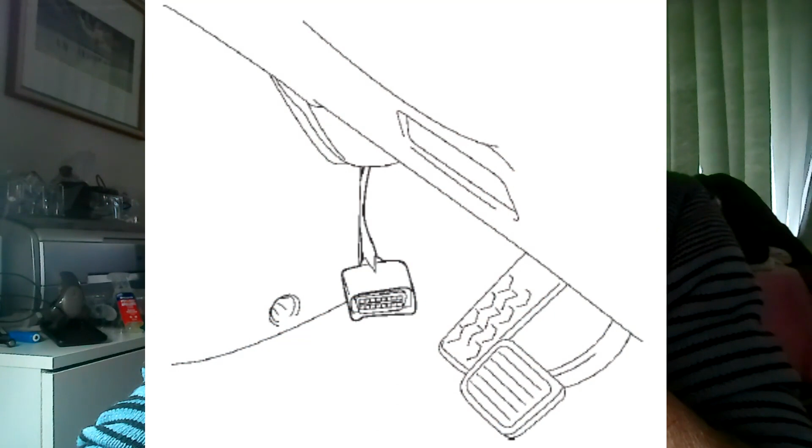Note, the RS232 loopback connector is only used for diagnosis of the Tech tool itself. Okay, so we don't have one. If you need one, you'd have to buy one. So the ALDL/DLC connector is located in the driver's footwell behind the plastic cover for the center console. You should be able to locate it by placing your fingers behind the plastic cover, pull out the plug and cable and allow the connection.

Note, in a left-hand drive vehicle, it's on the left-hand side footwell, not the right-hand side footwell. It's always in the driver's side well.

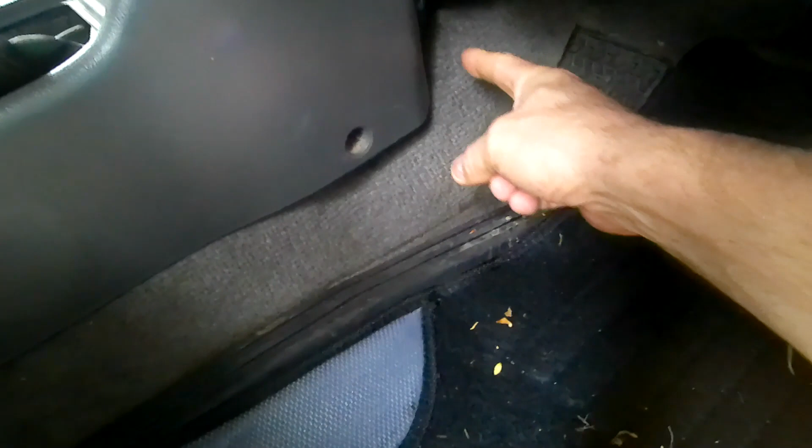Hi everybody, I just thought I'd show you some bits and pieces for the Tech 2. Okay, so the location of the cable that you need to connect your Tech 2 is going to be right behind this panel here. And there's the cable sticking out right there. That's what you're looking for. Now if you have a left-hand drive car, it'll be on the left-hand drive side. It's on the driver's side regardless of which car you have.

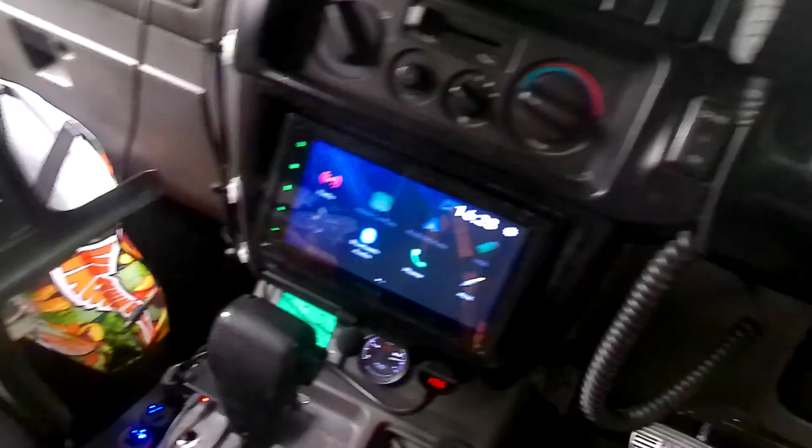Okay? This is a Tech 2. There you go. Tech 2, cable, and plug. See the plug with the adapter. That's the adapter to get it to interface with the car. That's where it fits on there.

Okay, so item number 1 is the PCMCIA card. Now I don't know if you can see, but in the slot at the top there is where you put the PCM card. In here we have an Isuzu PCM card, which is the one you need. The loopback connector, can't see one of those. So maybe it didn't come with a loopback connector. If it did, I don't know where it is.

We've got a bag full of adapters here, which we never use. We've got different interfaces and different vehicles, I suppose. And there's a box here with a power supply for mains and an American plug on it. There's also something here which I have no idea what it is. So I'll have a look and see if I can investigate.

Item number 2, the loopback connector, doesn't seem to be there. So, item number 3, the 1619 SAE adapter is this. That's the adapter, and it goes to the connector at the front there. You need to have that, otherwise you can't connect to the car. The DLC cable. This is the DLC cable. And the Tech 2 itself.

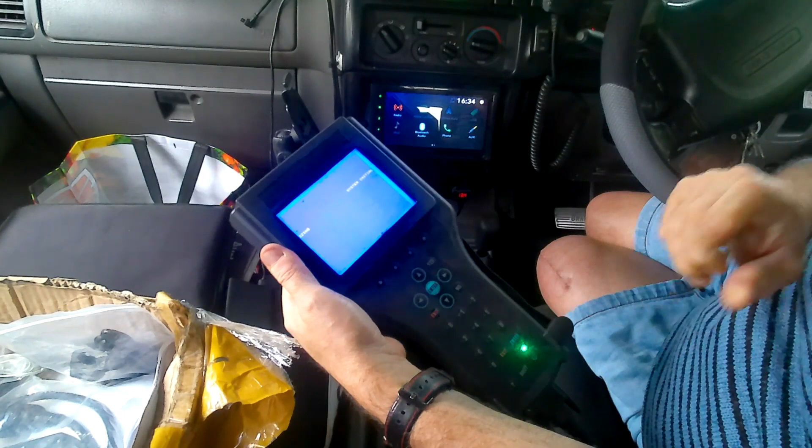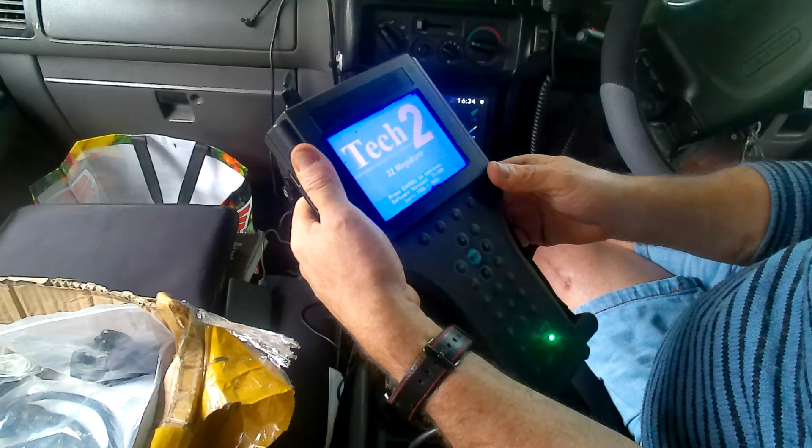Okay, so here we have the Tech 2, it's plugged in now, we've got the engine running. What we need to do now is switch it on. So we go with the power button, which is in the bottom right hand corner here. We press that and we get the initial screen set up. I presume you can see that from there. It goes through a number of self-tests and goes to this point here. It says press enter to continue. We press enter in the center there.

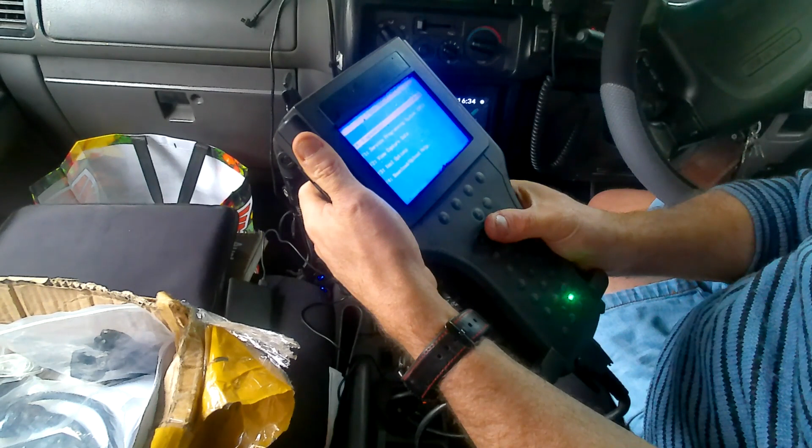Now it wants to know whether you want to go into the diagnostics, the service programming system, view capture data, tool options, the download, upload, help. So we'll go into diagnostics and we'll look at DTCs first. So we press enter again and it gives us a year. We have to pick the correct year for our vehicle. This one is 2000. It's a Trooper Bighorn Jackaroo. And the powertrain is a 4JX1. So we scroll down to L4 4JX1 and we click OK.

Now it says turn on ignition and we confirm for that. And there you go, it gives you the engine part number, the broadcast code and the identifier. We press enter again. And we can go into diagnostic trouble codes, DTC. And then we say read DTC info by priority. No diagnostic trouble code stored. That is a good thing. So we hit exit to come out of there. We could clear it if there was some, and there's nothing there anyway, so we'll exit again.

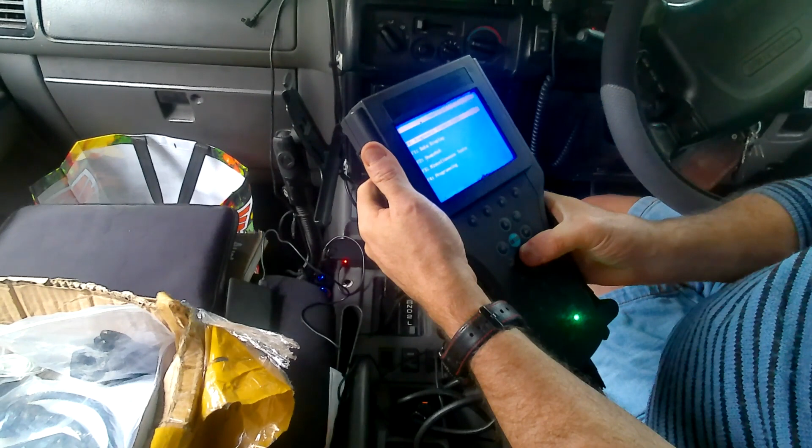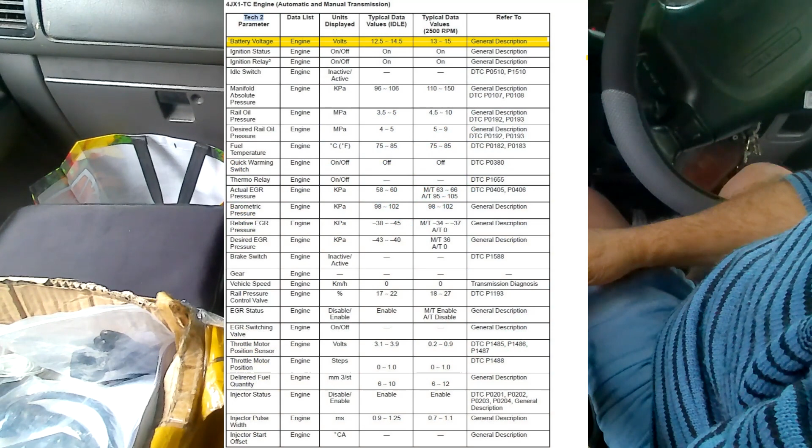Okay, so we're back to the powertrain. What do we want to do? We want to look at the data display. So we'll press data display and press enter, and it brings us up with the screen, which is the running parameters I showed you at the end of the video there. So you've got battery voltage 13.7 volts. We can rev that up a little bit, it'll increase. It's going up to 14.1. So that's good, it's the alternator output.

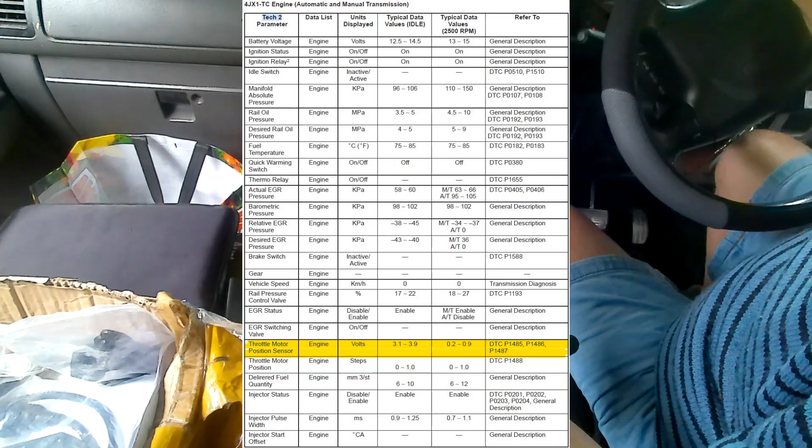Ignition status is on, 12 volts. Pedal position sensor is at 0, we're on idle. Now if I press that, you see it increases in percentage there. So we're always looking at the one with the white line on it. So the position sensor there is 0.33 volts, and as you see, as I increase, the voltage increases. The pedal position sensor status is closed. If I press it, it'll go to open. Idle switch is closed.

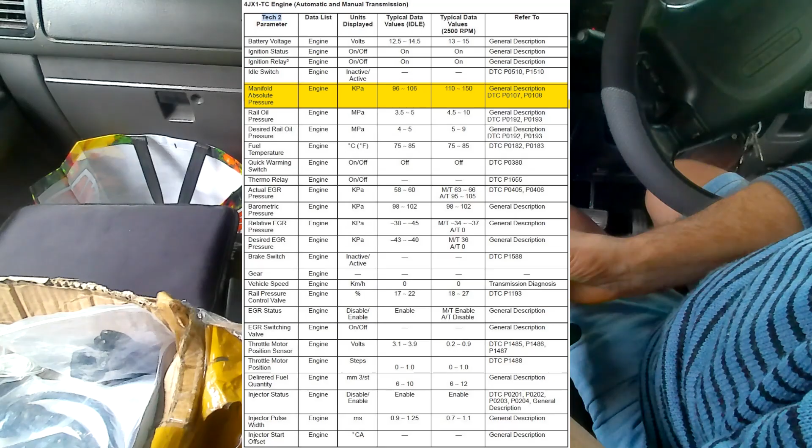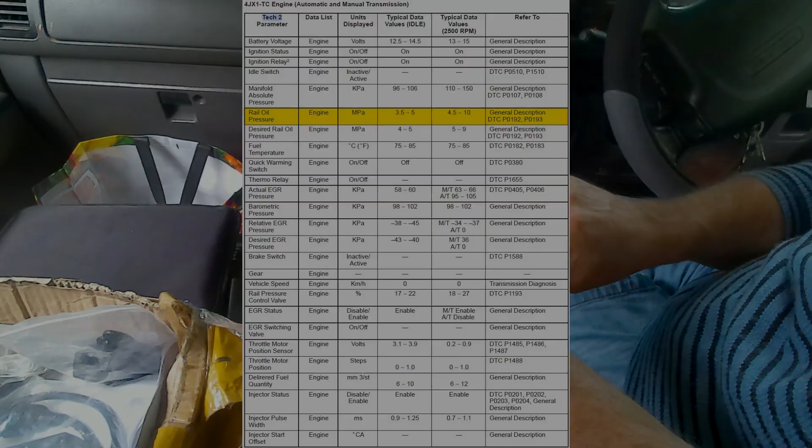Manifold absolute pressure 104 kPa. Barometric pressure 99 kPa. I think that's the outside pressure. Engine coolant temperature 54 degrees centigrade. And then the next number down is 9 of 40. So that's how many items we have on here, 40. Rail oil pressure 4.3. It's around about 4 MPa, the desired pressure. Desired rail oil pressure, which is about 4. So we're slightly above, but we're not doing too bad.

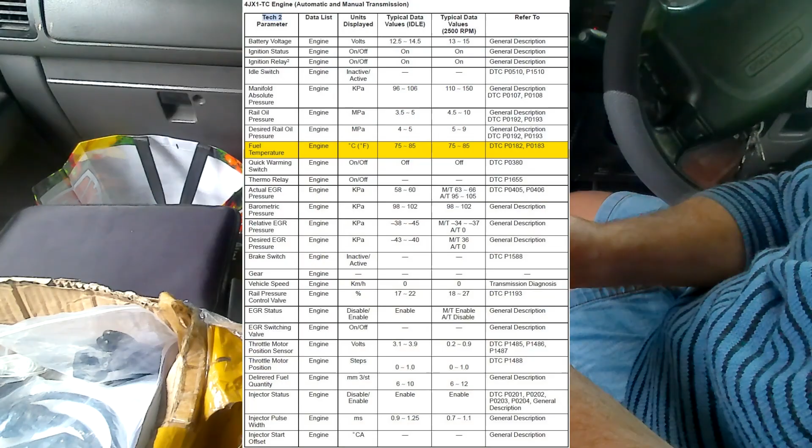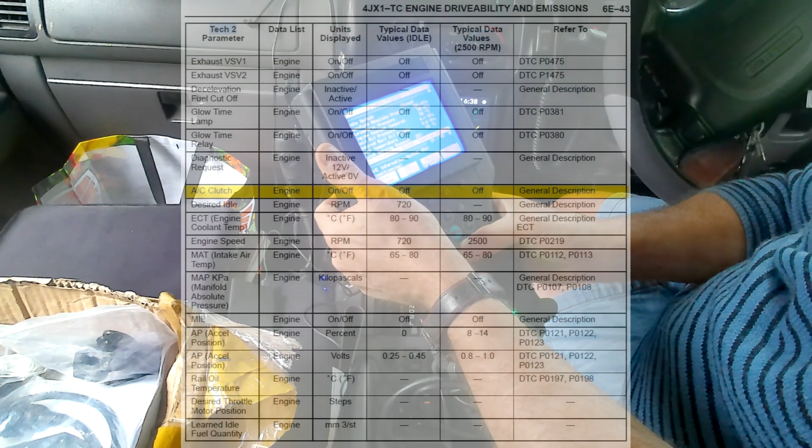Fuel temperature 44 degrees centigrade. Quick warming request is off because the engine's running. If we're on ignition on status, it might be on. AC information switch inactive. If I press the AC button, turn the fan on, you see we get 12 volts there. Turn the AC off, no volts. Okay, down one more. Actual EGR pressure 64.6 kPa. I don't know whether that's right or not.

Rail oil temperature, air intake temperature, desired idle speed, engine speed, brake switch open. If I press the brake switch it goes to closed.

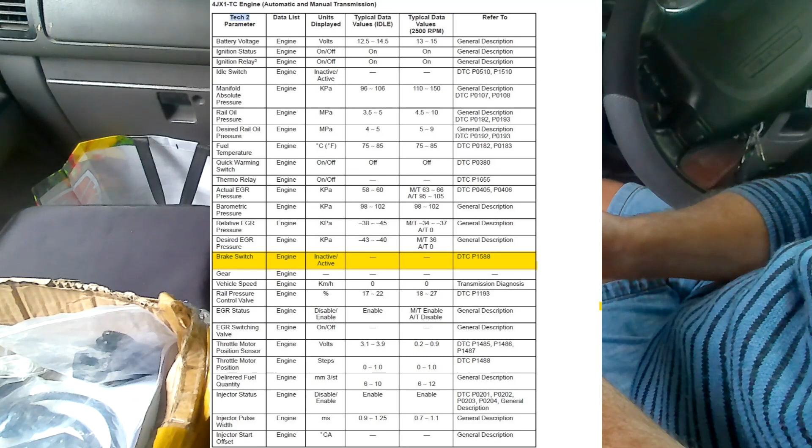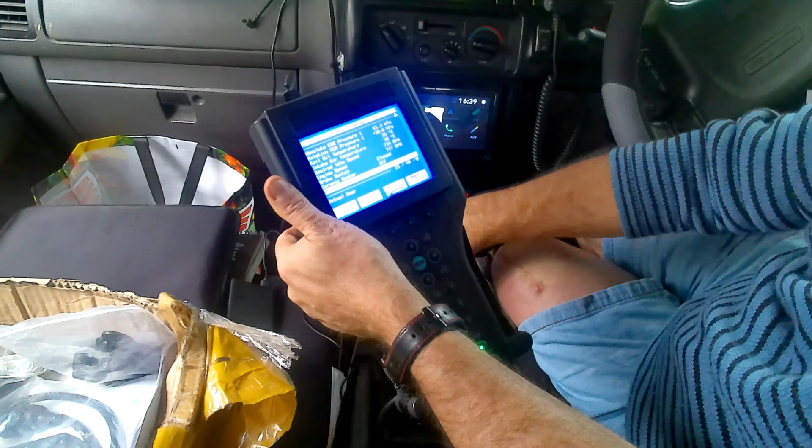Ceramic heaters are off. Actual gear, we're in park. If I put my foot on the brake and go into reverse or drive, you see it changes to actual gear is drive 3-2 low. It's in one of those. If I go to neutral, it goes to neutral. If I go to reverse, it goes to reverse. And if I go to park, it goes to P. So we're on 24. Vehicle speed, well, we're not moving, so it's 0.

Rail pressure control valve, 19%. Thermo relay on. EGR status. EGR switching valve. EGR regulating valve. Throttle position sensor voltage. Throttle position, 6 steps. Delivered fuel quantity, 5 cubic millimeters. STK, whatever STK means.

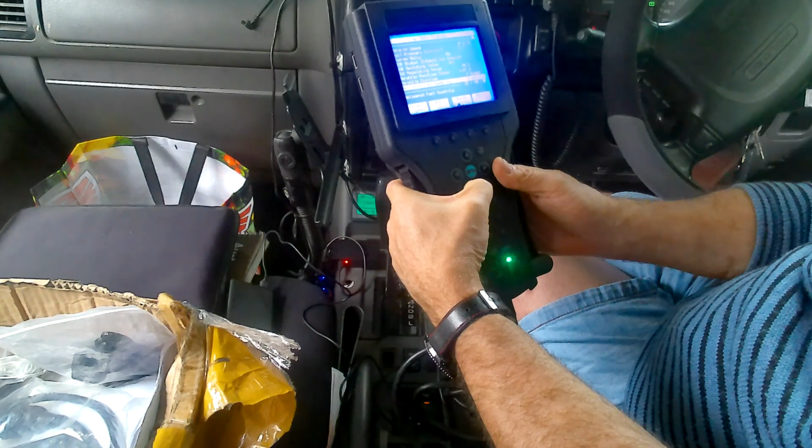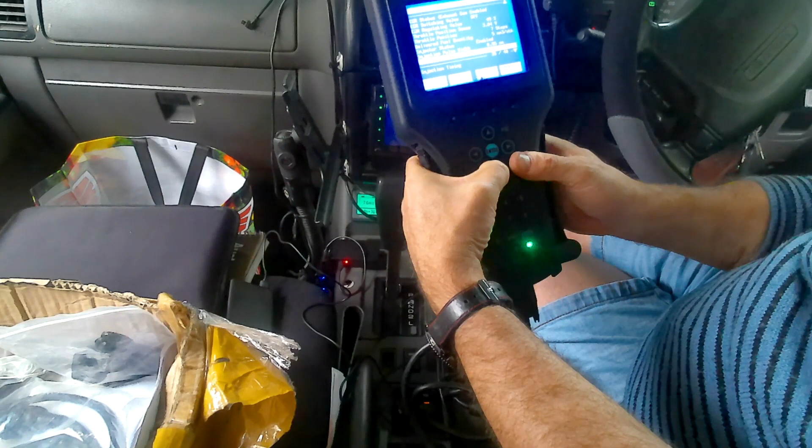Injector status is enabled. Injection pulse width, 97 milliseconds. Injection timing, minus 4.5 degrees CA, whatever CA means. Exhaust pressure, valve 2, off, off. Alright, so let's exit out of this.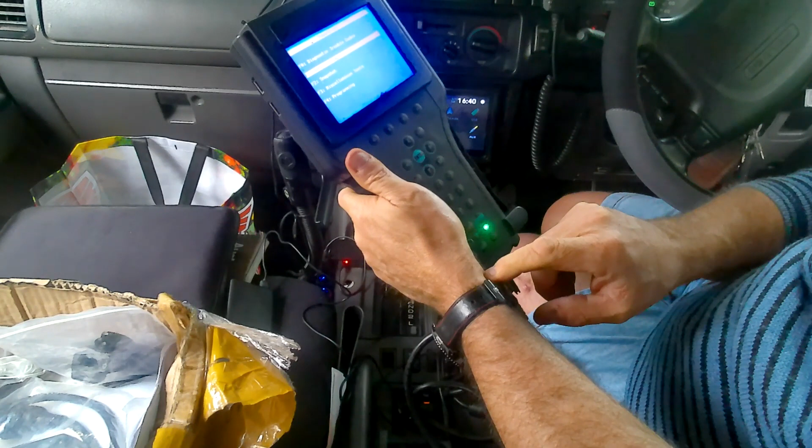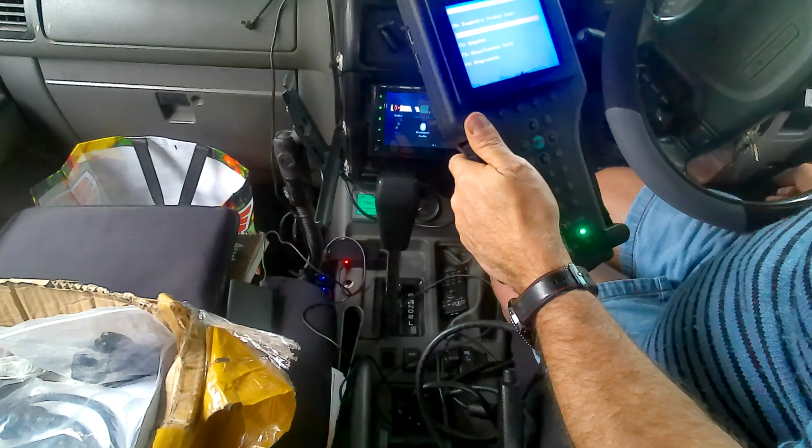And we'll turn the engine off, we'll go to miscellaneous tests. Now when I turn the engine off, I'll leave the ignition on, otherwise this will switch off. We'll have to pop the bonnet and we may have to go outside for this. I can't do the injector test because we're not up to temperature, but I can do the click test.

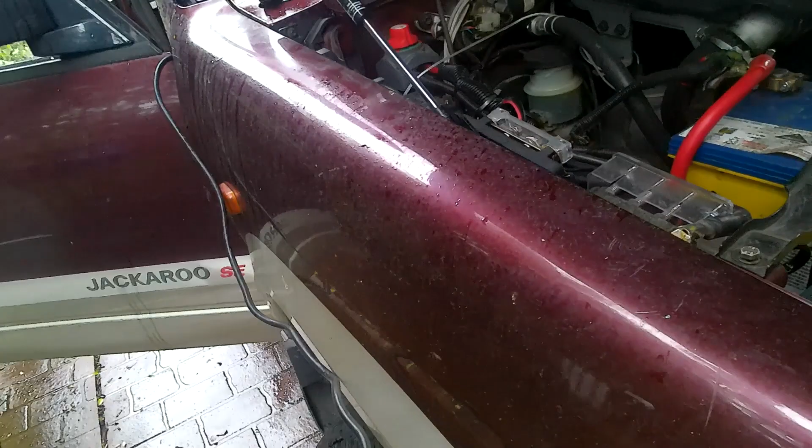So what we do here, we run the Tech 2 through the door frame here with the door open. The ignition is still on, and we go down to miscellaneous tests. Press OK, and you can see in here they've got the injector balance test and you've got the injector control test. I think the balance test is the right one, so we'll try it.

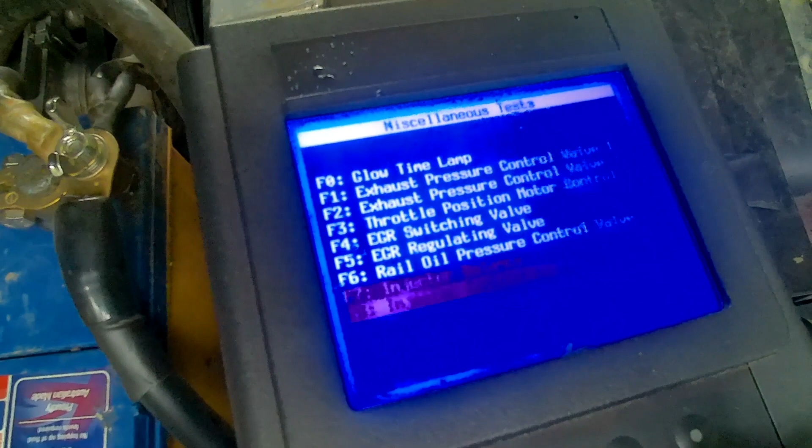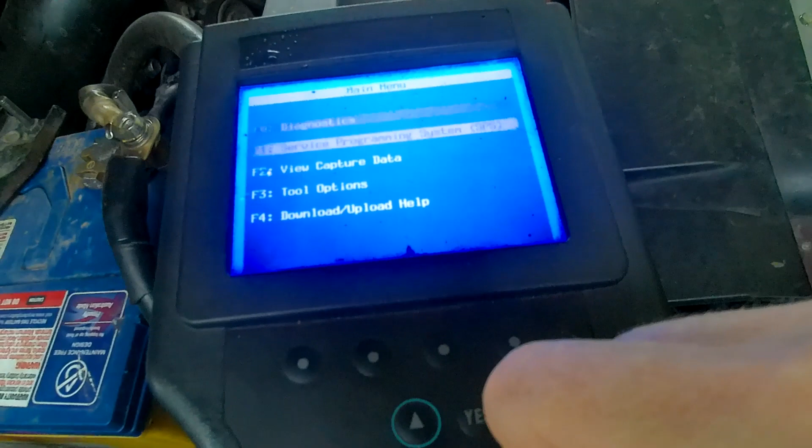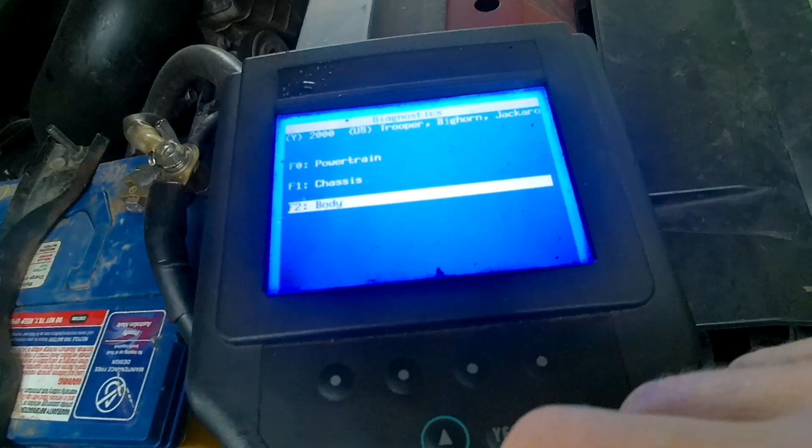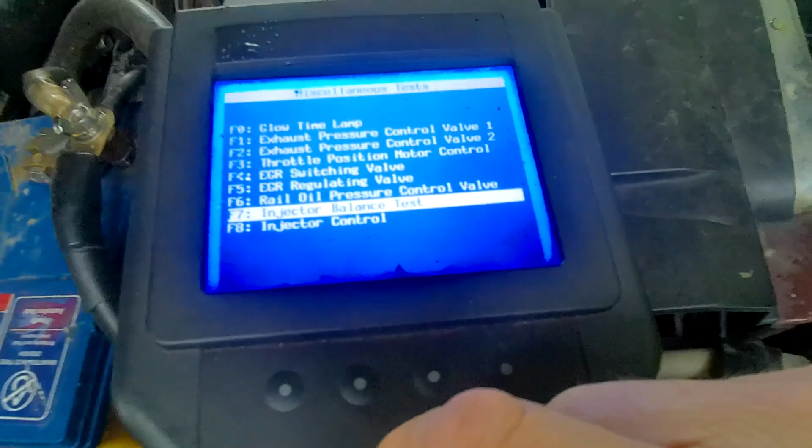Okay, bear with me. I'd actually turned the ignition off, so that'll be the reason why. Turn on engine. Now you can see what's happened here is because I've turned on the engine, it's rebooted itself. Right, saying the coolant temperature is too cold, it's at 60 degrees.

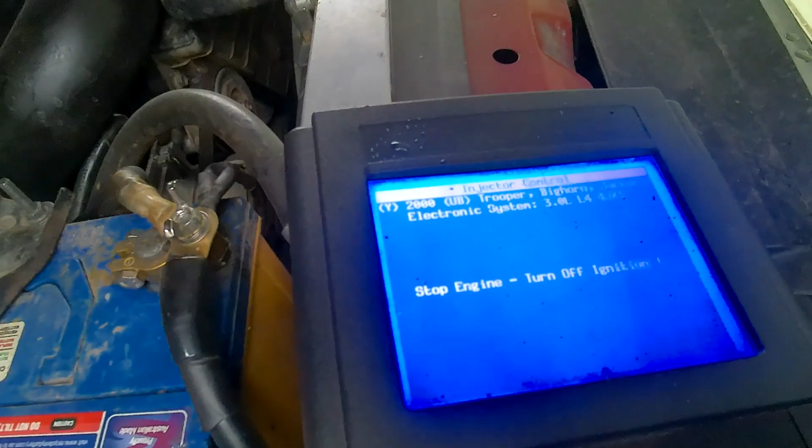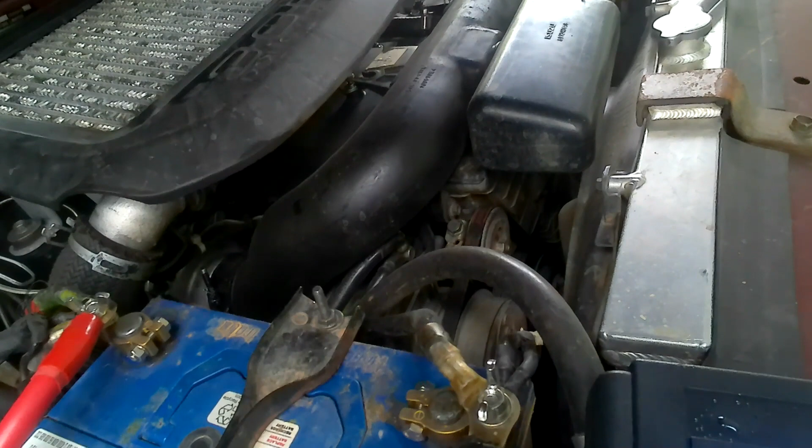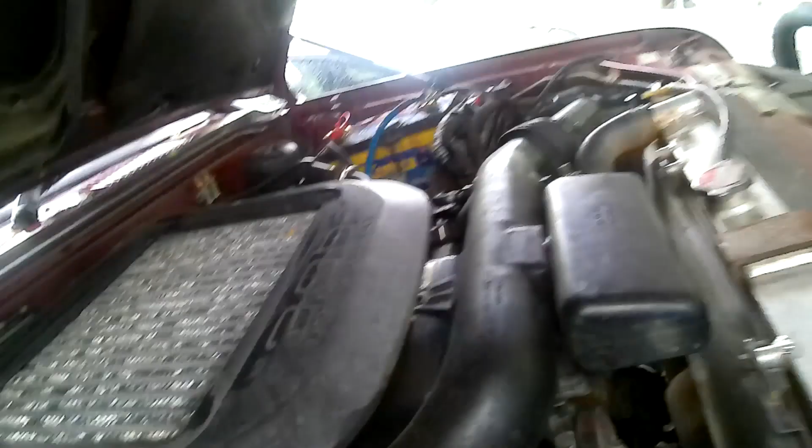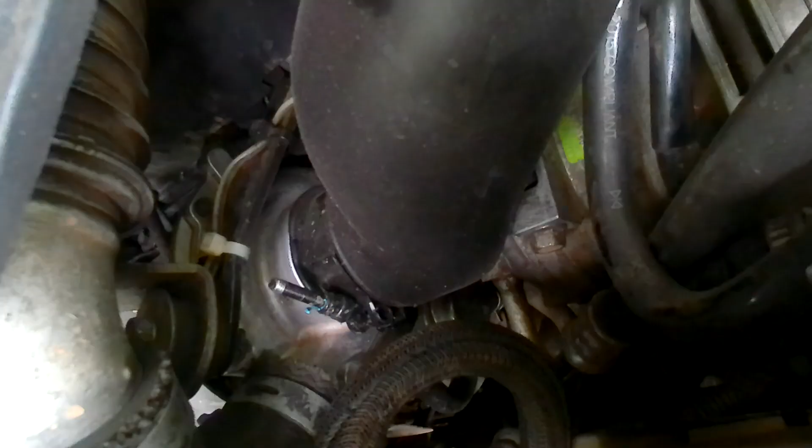Right, turn off ignition. Ignition is on, confirm. Alright, so we're on injector 1 now. Are you ready? Well, I heard it clicking, I'll do it again. And that seemed to work fine. So injector 2, now injector 3. And injector 4.

Now, I can't hear anything for injector 4, but it doesn't mean to say it's not working. So what I'm going to do is I'm going to try it again. So, I can't hear anything. So what we're going to do is we're going to get the stethoscope. See if we can hear it. Well, it looks like injector 4 isn't making any noises, so we may have to look at the solenoid in injector 4. In the meantime, we'll go back.

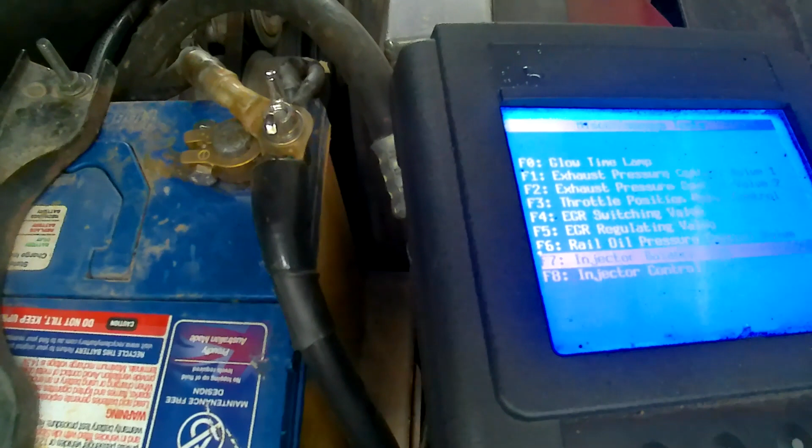Rail oil pressure control valve, there is a test for it in here. Wants the engine on for that, so let's give it a try. The engine seems to run okay, so I'll be surprised if that injector is faulty, but you never know. Now I'm going to have to reset this all again. Again, it says the engine temperature is too cold.

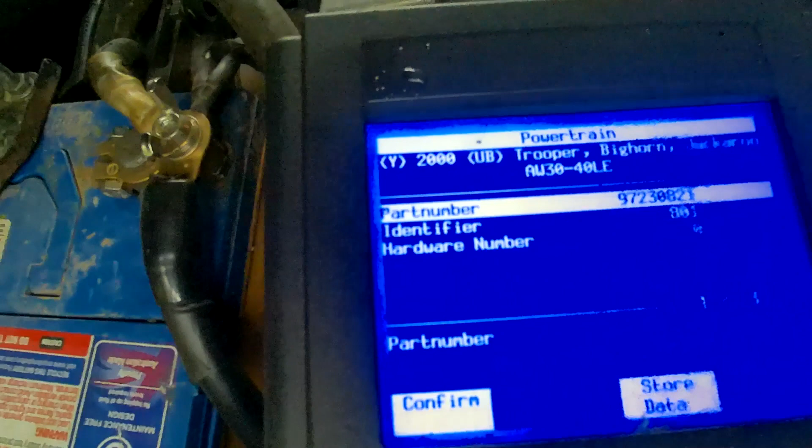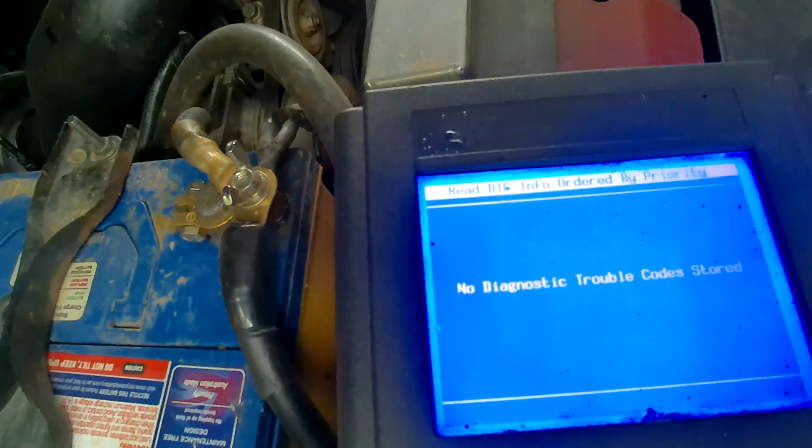So what else you can actually do as well: if you go into this point here where you select the 4JX1 and select AW30-40LE or your gearbox type, you can actually look at what your gearbox is doing. So there's no diagnostic trouble codes for the gearbox.